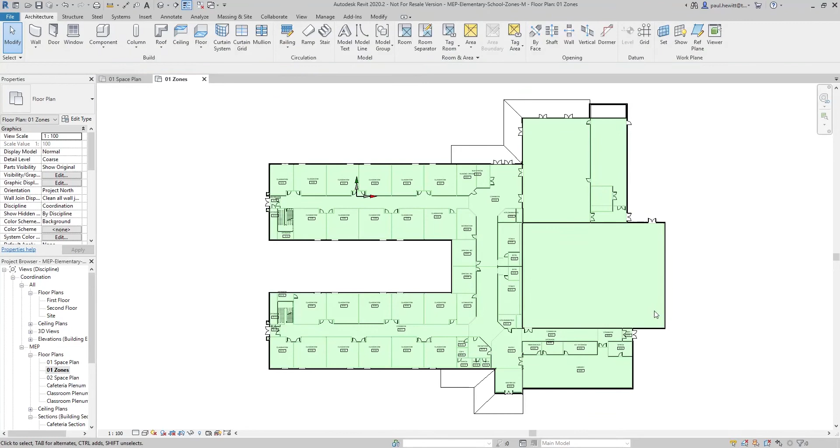So the next thing to do to be able to view the HVAC zones is we go down into our visibility graphics, expand this out so we can see the interior fill and the reference line. We'll turn those on. But in the meantime, we'll actually have to get rid of the interior fill for the spaces. And once I've gone OK, you'll see those spaces fill disappear.

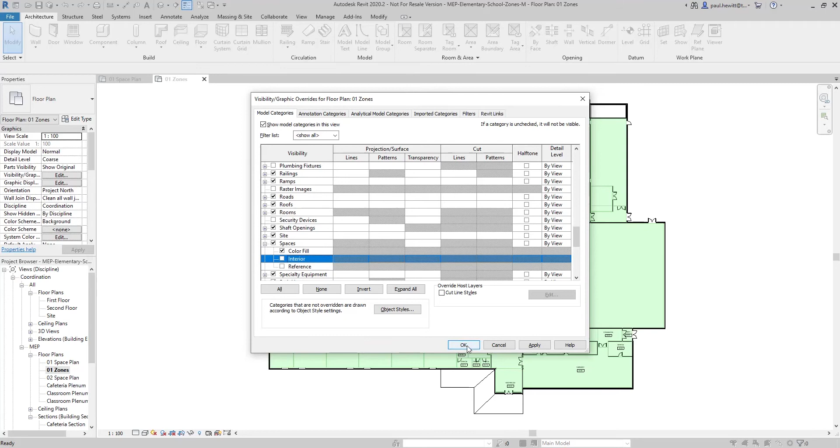So let's get some zones in here. So Analyze tab, zones. Now automatically we should have add spaces already selected. So all we need to do is select those spaces, give them a name. So let's change this from just 1, we'll change this to Classrooms 1. And we just need to finish the actual creation of the zones.

And all we need to do now is do exactly the same for the opposite side of the corridor. Now I could select these individually, but I'm going to use the crossing window in here. You'll also notice that it just goes up to Classrooms 2, so automatically just changes the number but keeps the classroom name for these zones.

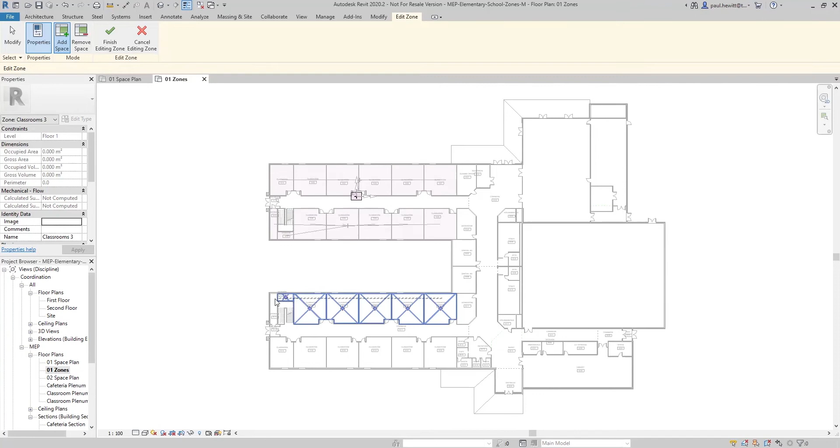So across to the other side of the other wing for Classrooms 3, and finally for now we'll just do the other classrooms here on the other side of the wing to make a zone called Classrooms 4. Finish that off. So you can see those zones already in here.

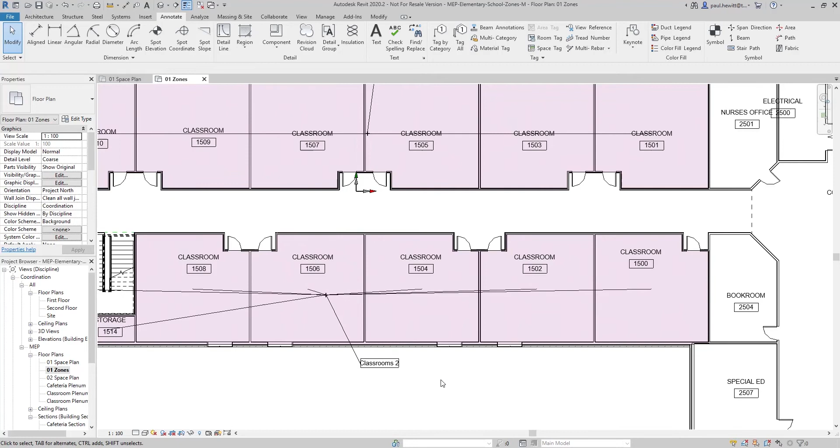So the next thing I need to do is tag these. So let's go into Annotate and Tag by Category. And you'll see here that once I select these zones, they're tagged automatically. Great. So let's just zoom in and take a look at that tag. Yep, great. There's our tags. So let's zoom out so we can see the whole view.

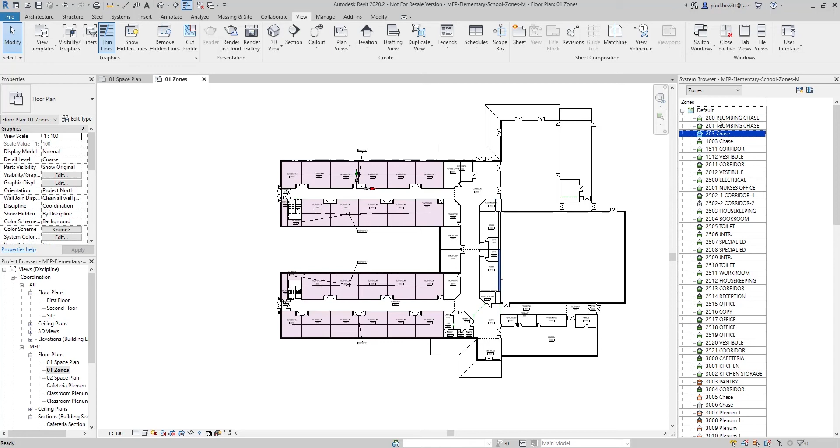Now we're going to explore the zones and spaces a little bit more. So to do this, I need to turn on our system browser. Now I could hit F9 or I could use the menus just to turn that on. So you'll see these are set to systems. What I need to do here is change that from systems to zones. And there's our 4 classroom zones already created. Now there's always going to be a default zone. This is where all of these spaces are hidden away in.

Now these spaces, you'll see the icons are slightly different, and we've got a problem here with these plumbing chases that are set to occupiable, and I can tell that by the icon. So let's change the properties in here. Let's take the tick away from occupiable. So we take that tick off and the icon will change next to them. So we've got a couple of other ones in here. There's one here that's got the same problem. So I select this chase and take the tick away.

You'll also notice there's a couple of icons with question marks in them. Now these are spaces that have originally been added to a particular room, but the rooms disappear, the spaces disappear, but the tag still exists. So let's remove this one and one more down here, this chase. So right hand click and delete, just gets rid of that, keeps it tidy, like so.

So what we will also notice is when we actually select these spaces, it highlights the space. But in this case, the space doesn't exist in the view. So if I right hand click and go show, it'll tell me that it's going to go and find a good view of that particular space. And this can take a little bit of time because it checks all of the views to make sure it gets the best one. And there it is.

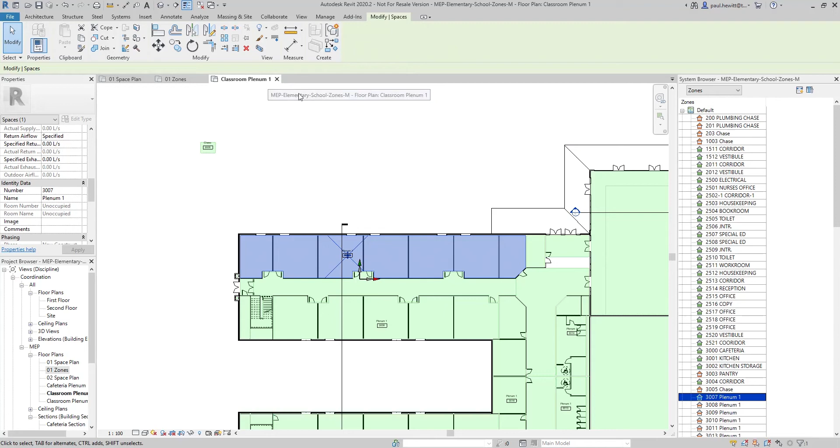It's opened up our Classroom Plenum 1's view, where we can get a better look of that particular space, and it's highlighted it there for us. Let's just clear that down, and in fact we'll use the close inactive views option, so we get back to our particular view.

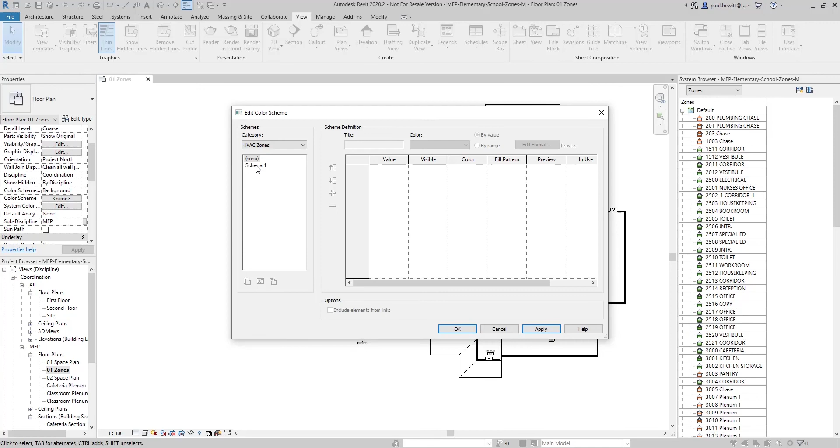Now we're going to actually put a color scheme on this view. So if we look in the properties, you can see color scheme here is set to none, so we have nothing set. So we select that button and we'll get a dialog box for the edit color scheme. So the first thing we need to do is make sure we're changing the HVAC zones scheme, and there's a scheme 1 already created for us. So there's our classrooms, and these are the colors which are configurable. We can select those, change those.

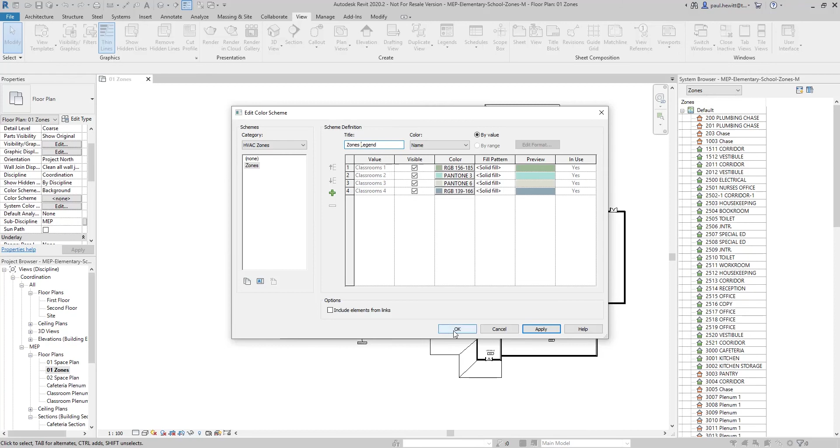First thing I'm going to do here though is change the name of our scheme, so we know it's for zones. So if I just pick OK there, and we'll also change the title. So let's change that title to Zones Legend. So again, anyone else using this can see exactly what it's for. And once I've gone OK, you'll see that the zones that are already in there will take on the colours in that particular scheme. Any other zones that are added will automatically get added to the colour scheme as well.

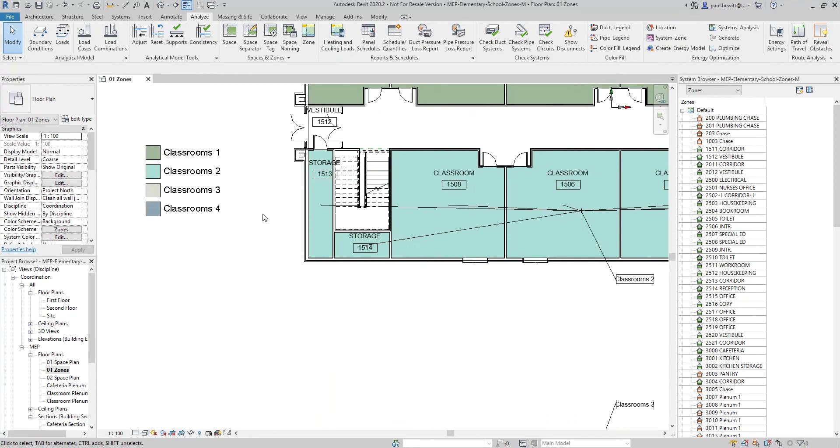And there's our 4 different colours for our 4 different zones. Makes it a lot easier to understand. We're going to go to Analyze, and we're going to use the Color Fill Legend here, and we'll plonk that down so you can actually see what color goes with what zone. Finally, I'm going to remove the reference lines, so into VG, Visibility Graphics, and turn off the HVAC zones reference lines. So that's zones within Revit MEP.